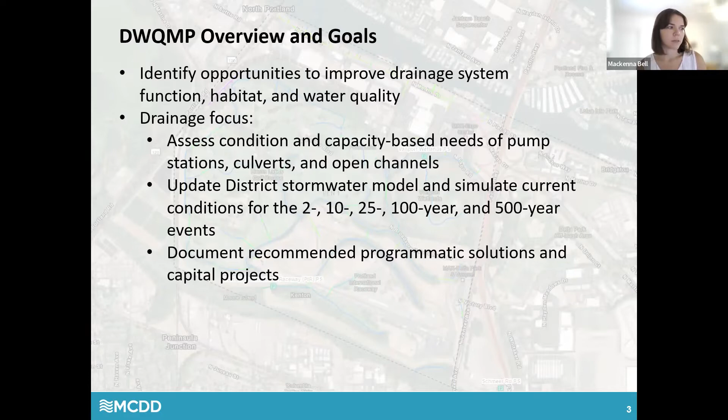For the conveyance system, we assessed the current conditions of the pump station, culverts, and open channels. We used that information to update PEN 1's stormwater model to simulate current system capacity for multiple different size storms. From there, we documented both programmatic solutions and capital projects as an outcome of these analyses, along with stakeholder input along the way.

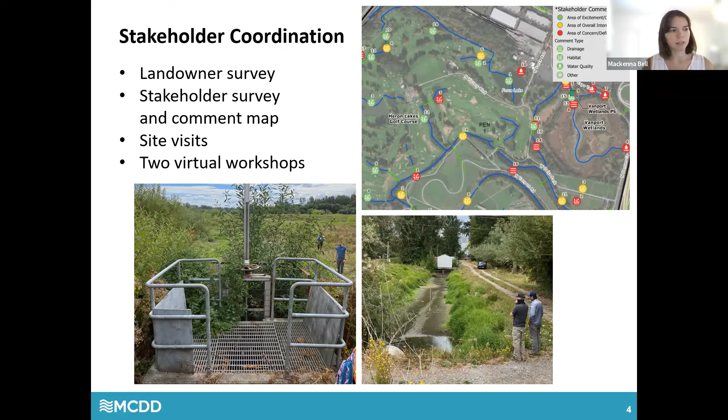Additionally, several members of these groups were able to attend a site visit we held in August of 2021, where we explored areas of concern and opportunity in the district. We also held two virtual workshops at key decision points throughout the process for stakeholders, and lastly invited them to comment on our draft plan.

A couple key takeaways from developing this plan: there's definitely a strong need for resiliency and redundancy as we have increased uncertainty with climate and seismic events. Secondly, our partners are very important for the successful management of this system, recognizing that multiple agencies work together and resources are limited. Lastly, working on this plan with BES has given us the opportunity to explore multi-benefit projects where we can simultaneously improve drainage and also habitat and/or water quality.

For the conveyance system capacity and condition assessment, Parametrix first relied on a pump station condition evaluation performed in 2016 around the time of the MCDD and PEN 2 master plans, which included all pump stations in all 4 districts. We supplemented that data with additional flow testing for each pump, visually inspected the outfalls, took thickness measurements of the discharge lines, and interviewed operations staff.

A capacity analysis was completed in the stormwater model, based on comparing peak water levels for different sized storms to critical elevations that MCD staff identified throughout the district. Based on that, we found that Vanport Wetlands Pump Station was shown to only be able to handle a 2-year sized storm event, and the PIR Pump Station was shown to handle a 25-year event. The condition assessment also identified a need for redundancy at the pump stations and some wear on the discharge lines.

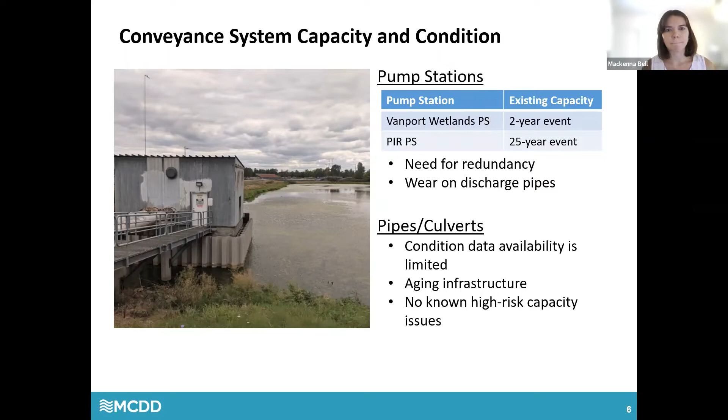This map shows the inundation levels with the pumps running normally. It looks fairly similar to the last slide, but the important difference is the colors are different. The orange is still representing a 100-year event, and now the yellow is representing a 500-year event. So it's a much different level of risk because this one is showing flooding for a much larger and less frequent storm.

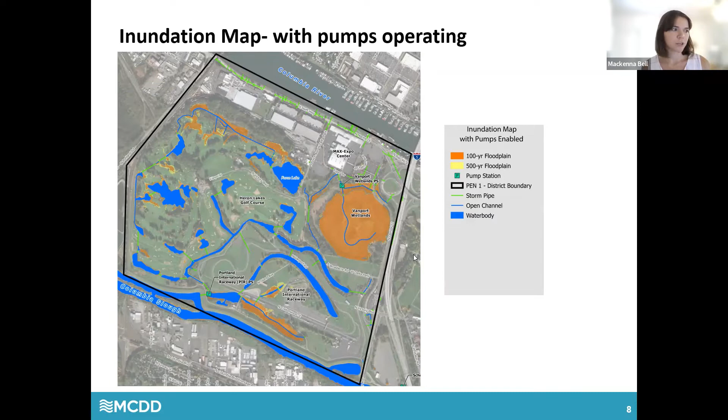As a result of our evaluation and stakeholder input, these are the projects we identified, listed in order of priority. First, to no surprise, is the PIR pump station replacement project, followed by Vanport Wetlands pump station replacement. After that, we have daylighting 2 culverts, 1 in the golf course and 1 in Vanport Wetlands adjacent to Force Avenue. And lastly, we have improvements to the discharge of Mud Lake in the golf course.

A wide range of costs is shown here, based on the level of preliminary design, which is appropriate for this planning effort. The low range is a minus 30% contingency from the average cost, and the high range is a plus 50% contingency. This would continue to narrow as planning and design progressed, and it's helpful to be aware of these ranges as we incorporate projects into our own capital planning process.

These are the recommended programmatic solutions that we identified. Many of these were also recommended from MCDD, PEN 2, and SDIC master plans. There are additional details, descriptions and costs in Appendix I. Some of the highlights are a CCTV inspection and condition assessment program, a debris barrier program, and an access and easement needs study.

To go through more details on the individual projects, first we have the PIR pump station replacement. The main issue here is the age of the equipment and the discharge lines, and the structure is also reaching the end of its useful life. The solution identified includes replacing and relocating the station, adding another pump and a backup generator for redundancy, and an automatic trash rack. Additionally, this project also includes opportunities to include plantings and shoreline gradings to enhance habitat.

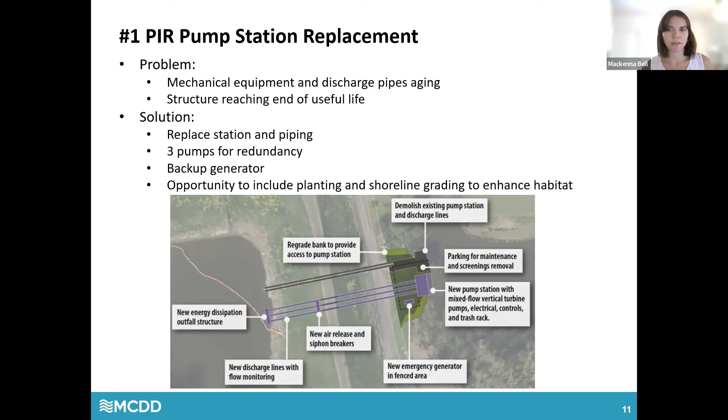For the Vanport Wetlands pump station replacement, similarly, the main problem again is age. Also, there's a lack of redundancy and there's no SCADA communication still. The solution we identified is to replace it and relocate the station for better maintenance access, and we would add another pump, backup power, add SCADA, and an automatic trash rack.

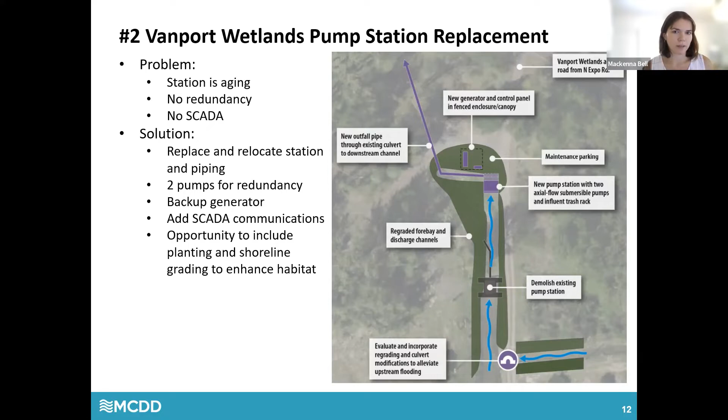The golf course culvert daylighting project, you can see the location of this culvert in the upper left corner. This culvert is undersized and in pretty poor condition and also sees heavy beaver activity. Heron Lakes staff told us that they see localized flooding and impact to operations during storms. The solution here would be to replace the culvert with a larger box culvert for the path crossing and then regrade the upstream channel to improve habitat connectivity.

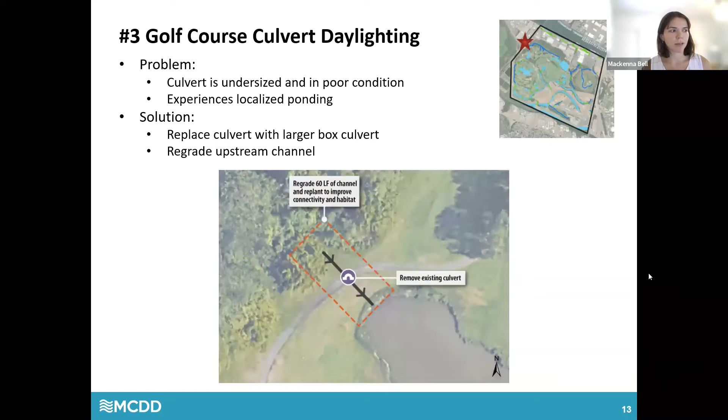Similarly, there's a pretty long culvert next to Force Avenue in the southwest corner of Vanport Wetlands. It's also in poor condition and has sediment buildup. Maintenance right now is really challenging because it's pretty inaccessible. The recommendation is to daylight this culvert into a channel by removing it and then excavating and grading a channel to match the adjacent reaches of the channel.

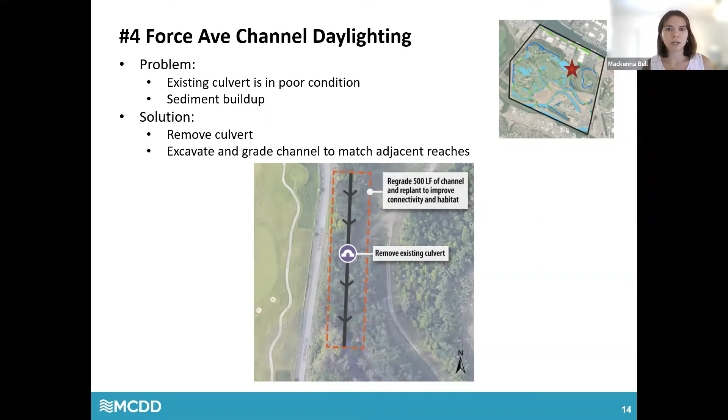The last drainage project recommendation is at Mud Lake, in the northern area of the golf course adjacent to Force Lake. There are 3 existing discharge pipes from this lake that are pretty filled with sediment and partially collapsed. The recommended project is to remove these and install, again, a large box culvert under the pathway, and then regrade adjacent reaches for better connectivity. It also includes installing a weir structure at the discharge point so they can control the lake water level.

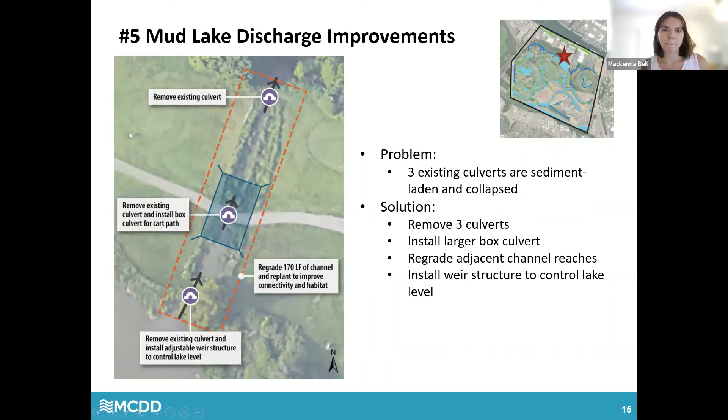The programmatic recommendations for habitat and water quality include a water quality monitoring program, a sediment load source evaluation, a levee seed mix evaluation, vegetation management evaluation on the golf course, and a water quality assessment of the stormwater contributing to the right-of-way on Marine Drive, which discharges directly into the Columbia River.

To recap, this plan focused on identifying opportunities and deficiencies to improve the internal drainage system function, habitat, and water quality. Several opportunities were recognized for multi-benefit projects that integrate drainage and habitat water quality improvements. Our plan is to incorporate the drainage projects and programs into PEN 1's capital improvement plan, and similarly, the habitat and water quality projects are expected to be incorporated into BES's CIP.

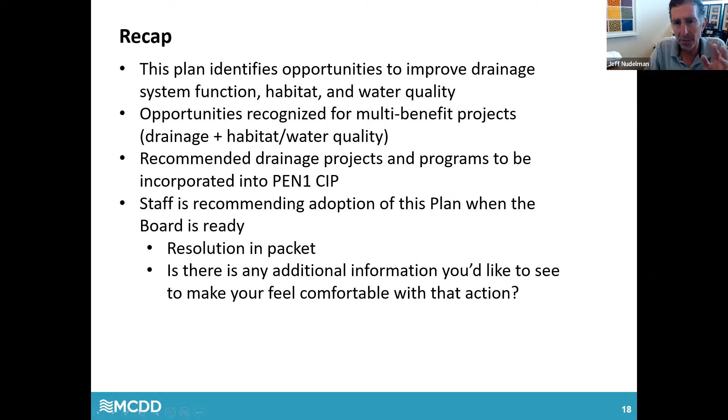Looks like Jeff has one before me. Hey Jim, yeah, excellent Mackenna, thank you so much. Question about the last couple slides before the recap and the listed programs, that one and the one before. Are these in any type of priority, or are they just to give us an overview of what you've identified as critical components we've been hearing about for many years? I'm just curious if they are at all prioritized.

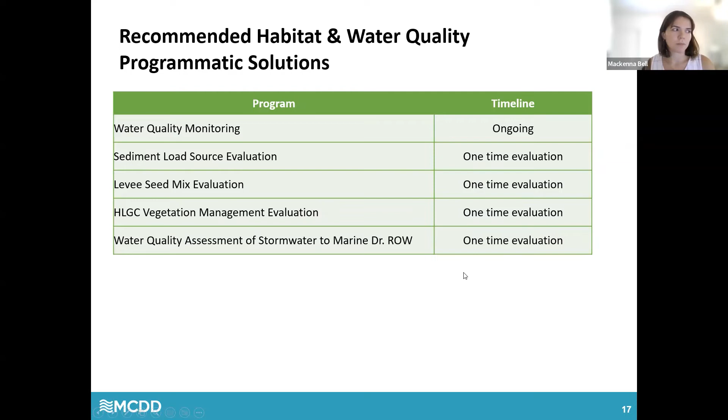In the event funding becomes an issue at some point—yeah, this one is listed in order of priority, first prioritizing plantings and shoreline grading. The programs are not in order of priority; these are generally a lot less expensive, more about doing evaluations to further understand some of the water quality issues in the district, but this one is in order of priority. Great, thank you very much.

A question I have is related to your recommendation that these get placed on the capital improvement plan. Some of these look familiar from what I've been doing on the board, and I suspect they're already in the capital improvement plan. Is that true? And then whatever's not in the capital improvement plan will then also be included in addition, correct? Yep, yeah, exactly.

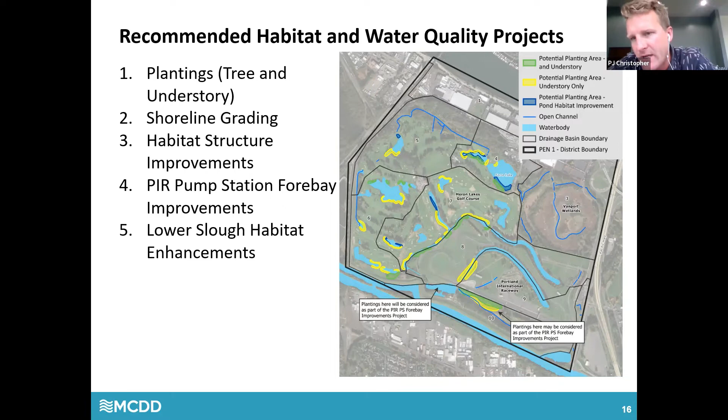So we're just talking about these ones right now, and you're right that these first two are already in there, but this is PEN 1's first drainage master plan in quite some time, so we didn't have really good actual planning level cost estimates for those. This gives us a much better idea, and it's actually not too far off from what was already in there, which is great. But this gives us a better idea for what we actually want to include, and the bottom three would be new projects to include.

Then Bill, I have another question, but I can go after you since you've got your hand up. Yeah, thanks PJ, I'm just supplementing Mackenna's response.

She's correct, and we will add projects to the CIP if anything like this comes about. But recognize that the PEN 1 CIP includes assets that PEN 1 owns or has a very close connection to. Vanport Wetlands, this pump station, is kind of a one-off, but the remaining three projects identified here are on Parks property, so technically they would likely be Parks assets, and maybe Claudio will have a different take on this. But if it's not a drainage district asset, it's not likely to be on the CIP, though that doesn't mean PEN 1 couldn't contribute money towards these improvements—it just may be documented in a slightly different manner. So I wanted to make sure you and other board members understand that what's on your 5-year CIP should represent just your assets and those under your control.

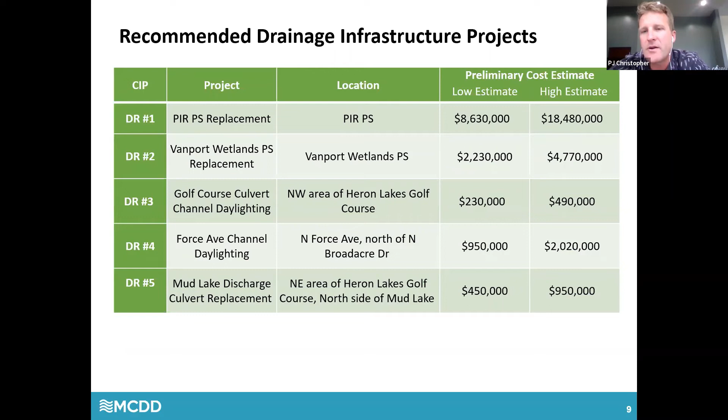That's a great question. There are project fact sheets in the back of the plan with more detail about connecting habitat and water quality projects. For example, one habitat project is to improve the forebay of the PIR pump station, regrade and recontour it, and do some plantings. Combined with the pump station replacement project, this would really help water movement by reducing sediment and debris, and creating a better pathway for water to reach the inlet of the pipes instead of where it is now.

Understood, and kudos to you, that was pretty clear when you explained it on that project. I just wanted to bring it up and put it out there. That is very helpful. Thank you, great question.

Thanks, PJ, I had that same question. Obviously each project would have its own specific analysis and drivers, but just confirming, is it generally the case that habitat projects would not adversely impact, and in most cases would benefit, system capacity for stormwater storage and have a positive impact on conveyance as well? Is that generally true? Correct.

We also had our maintenance staff, as well as PIR and Heron Lakes, look at the planting areas to remove any that we felt would cause extra maintenance work. So yes, correct, they would not be detrimental to flood control.

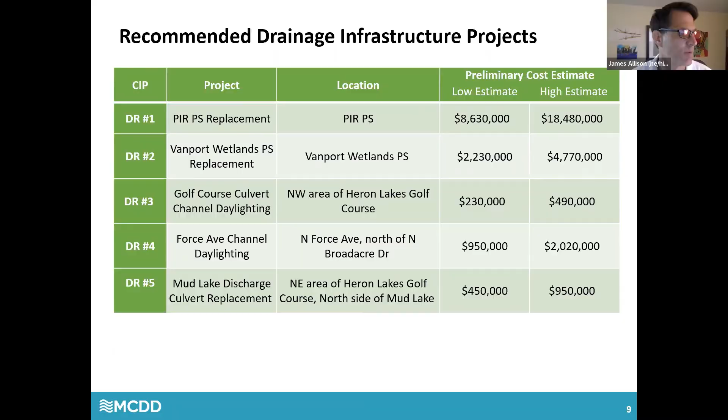Great, thank you. Well, I don't want to get ahead of the board. I did read the entire document and made comments. Thank you to Mackenna and the team for providing a way to comment on the document. I look to the board as to whether the board is ready to adopt this. I've read it, I feel in my position ready to adopt it, but I look to the board to see the board's comfort level in doing so. And if the board feels that way, I'd entertain a motion.

Thanks, James. I'll just weigh in here, starting with a huge thank you to all the staff, Mackenna, and everyone else who worked on this. I know my team at Metro has been engaged in the process and has really appreciated all the opportunities to weigh in, and definitely I think in that final draft saw a lot of their comments reflected. So just want to say thank you for that. I am happy to vote on this today for approval, but also happy to wait as folks are digesting it.

Yeah, and as I said, just coming back from a long vacation, I would appreciate a little bit of time, unless there's some significant impact on staff work going forward. I'd love to take a moment to digest and make sure I've circled back with folks here at Parks. This obviously touches a lot of our assets, and I know there's been a lot of involvement. I just want to make sure everybody's had their say and been heard before we go ahead and vote, if that'd be all right.